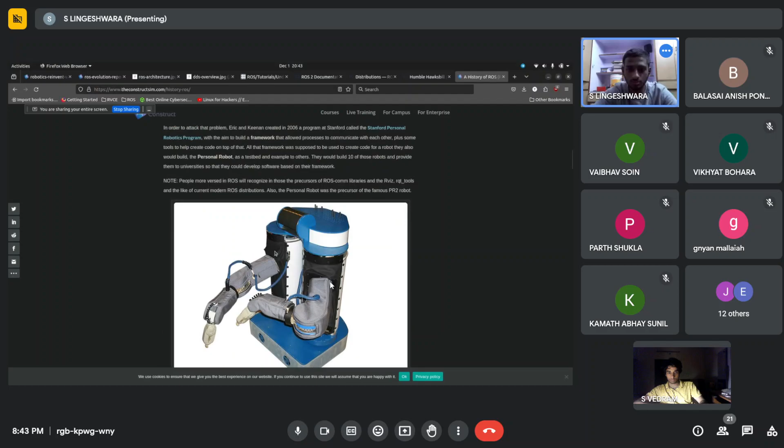So what happened was they started this as a personal project, and then a company - I don't know, I forgot the company name, it starts with W - that company started building personal robots. These same guys started to build personal robots, and once they did, they started focusing more on ROS.

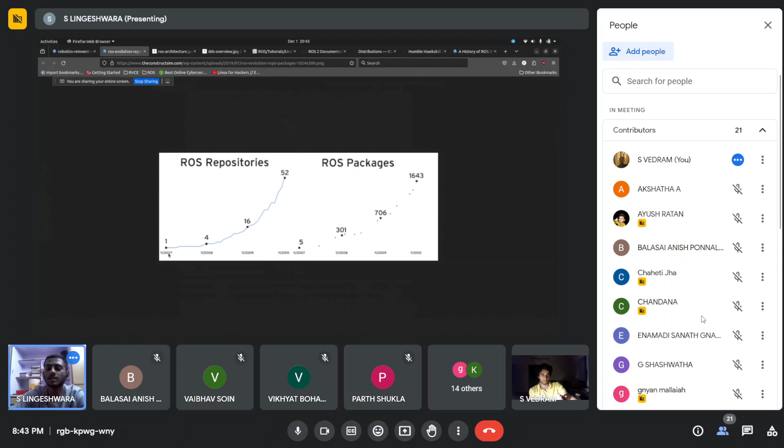Once they started to focus on ROS, it took off very fast, and I have an image showing how fast the ROS repositories and packages grew. This was when they were working under that company, and how people started contributing to a single framework which can be shared by everyone - that's the beauty of open source too. So they started this.

Look at the tangent, look at the curve, how it's like straight up. And once the number of packages and all started increasing, sadly what happened was the company suddenly announced in 2013 that we are going to dissolve. Everybody was wondering, and a lot of people in fact started using ROS properly in their projects. ROS made deals with some companies to ensure smooth working of the operating system, not of ROS itself.

Like one example is Gazebo. Now, what is Gazebo? Gazebo is a 3D simulator. You can simulate any kind of world you want in Gazebo. There are other simulators as well, but a lot of people, just because they're using ROS, and Gazebo is already very easily compatible with ROS, didn't use the competitors or other alternatives available in the market.

So when the company all of a sudden announced, we are going to stop, we are going to dissolve - this happened in 2013 - everyone was in shock. And that was when Open Source Robotics Foundation was formed to continue the work of ROS. The company name is Willow Garage. Okay, Willow Garage, that's the name. So that's what happens.

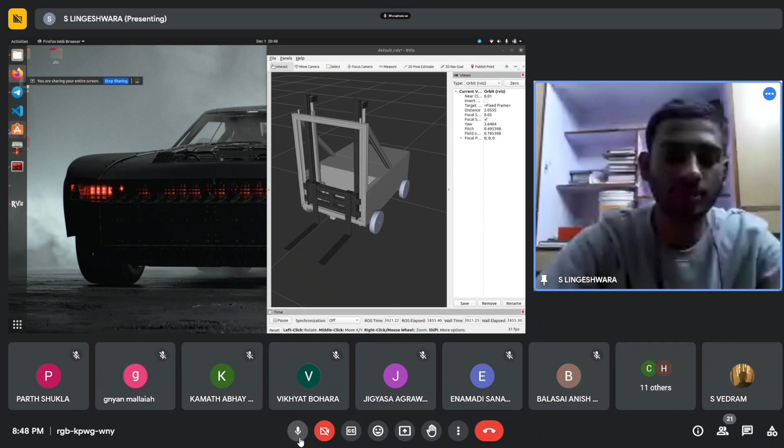Yeah, so one thing you might be thinking is: is ROS an operating system, right? I mean, the word operating system is there in ROS, right? But we made you install Linux. We didn't make you install some other operating system called ROS or something. So where exactly does this whole operating system thing come into picture?

Okay, so when you're building a robot, you will have multiple high-level algorithms. You will have algorithms that deal with how you want the robot to move in a very complicated environment, or figuring out what environment it's in with the details it's given. Those are extremely high level algorithms that are assuming you're giving it a lot of data to even work. But the thing is, where is all this data coming from?

This data is coming from the sensors you've put throughout the robot, like a wheel encoder. So what is a wheel encoder? It's basically a sensor that calculates how much a wheel has rotated. It's extremely important if you want to find out how much your robot has moved. If your robot has moved 1 meter, your wheel encoder will tell you your wheel has rotated these many degrees, and based on it you can calculate how much the robot has moved.

Or you have an IMU, which will tell you how much it is accelerating at a certain moment. So all these are low-level hardware stuff, right? As Lingesh told, all these complex algorithms will tell that the robot should move at a velocity. Who is going to execute that velocity? It's the motors on the robot and the motor drivers, controlled by a microcontroller like an Arduino. So ROS is basically that overall thing between all these high-level algorithms and the low-level stuff of controlling and getting data from sensors. It's that all-in-one package that did not exist before.

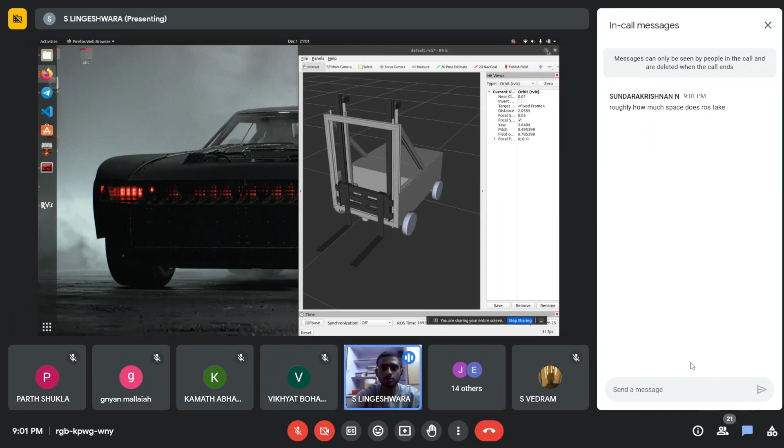I wanted to show you guys how this visualization works and all that. One second. So this is the RViz window. This is ROS1, okay, but still it's fine, we can use it. See, now it's closed.

This is my RViz window. This is how it will open for you guys also. See, the advantage is that the GUI is already there. I don't have to sit and create the GUI. And you can also do a lot of other stuff as well.

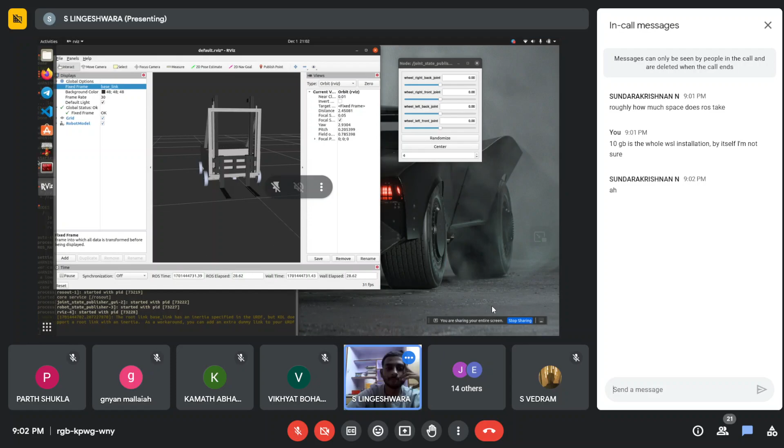See, for example, base_link, add robot. You guys have seen HIL, no? Can someone unmute and answer in the workshop? Yeah, see, now you can visualize HIL on the RViz platform itself.

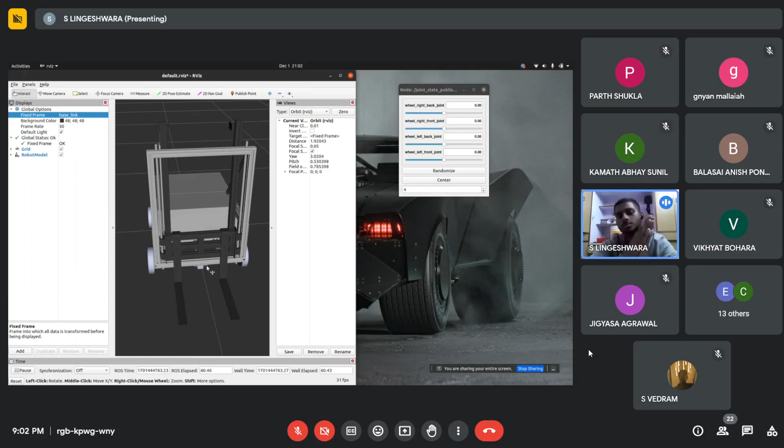Now, in the actual HIL, if I want to get laser data, I have to do a lot of work, I have to find what is their driver, ROS particular driver for my LiDAR, and then have to integrate it and all that stuff. But the advantage of using this RViz is for visualization.

If you want to use Gazebo, I'll show you what Gazebo is also. So this is how you basically visualize. If you want to add anything, for example, you create a map and you want to see what map you've created, there is something known as map topic. When you click, now there is no map obviously, but if there is a map, it will show up here. Likewise, anything you want, any kind of data, camera, depth cloud, some things which we might use is probably camera or LiDAR, laser scan.

Laser scan, so 90% we might use in our stuff also. Point cloud, odometry. These are the things that we will be using, and what these are, you will get to know slowly. There's nothing to worry about this as of now. So this is one thing which I wanted to show.

I'll close this. And another thing is Gazebo. Hopefully it will work. Launch. Okay, Gazebo.

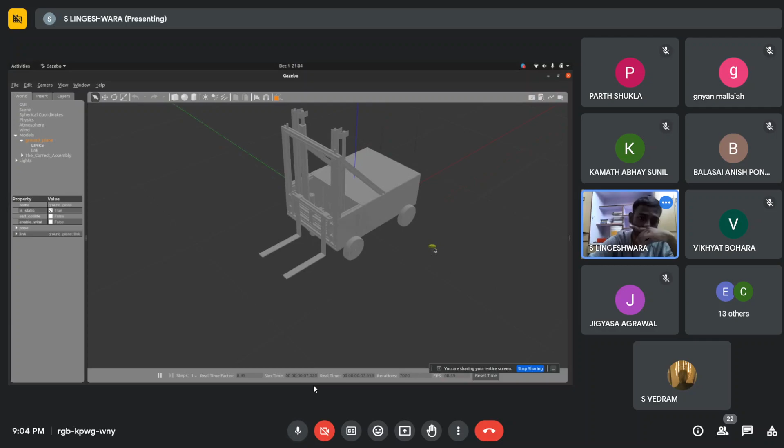When did you do this package, bro? This was some long ago. I think once it started opening like some haunted thing, after that he figured out how to get it together. Okay, send it to me. Send this package to me later.

Okay see, this is your Gazebo window. This is how the Gazebo window will look when you guys will be working also. The main point of Gazebo window is I don't want to sit and do everything in practical. So for example, for the URC challenge, I want to create a world.

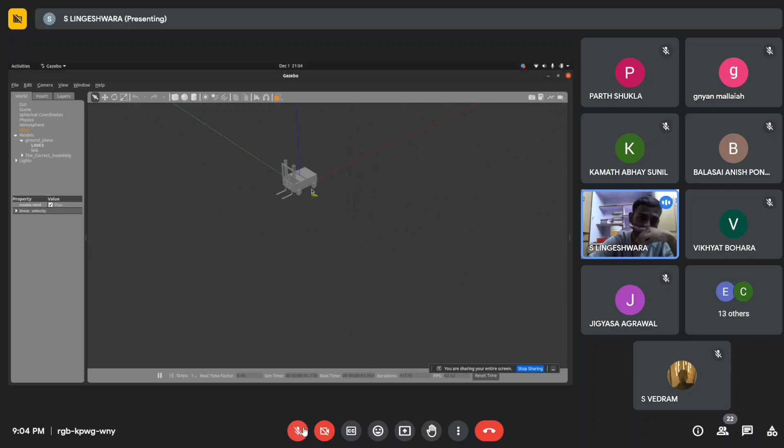You can add it here, change every parameter also, the physics of how the wind will be blowing and all that stuff. But more importantly, if I want to create a custom world, for example URC only - University Rover Challenge - I can create a space where there will be a QR code already in the world, and I can simulate how the robot might work. Using that, I can make changes to my actual robot. That's the whole point of Gazebo. It is a 3D simulator where you can change all the physical parameters and stuff.

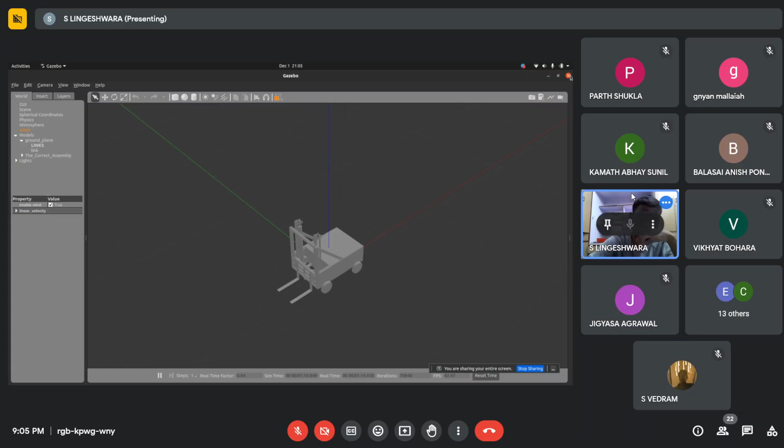These are the two main things which you guys will be using, Gazebo and RViz. If we have enough time, we can also create a small world and launch our own robot. We'll see how things go, and then we'll decide what to do.

You can also show that real to sim video if you have it on your desktop. Where did we send it? WhatsApp. You want me to send it on Telegram? Yeah, that would be better. One second, where is this?

The difference between Gazebo and RViz: RViz is more used for what is actually happening in your real life scenarios. It's a visualization tool for all the data that's coming in from your sensors. I will show you one RViz example. Gazebo is more used for simulations, for environments that you want to simulate and see how they behave without actually doing it.

RViz is to get to know in real life what it is doing. We'll show you a laser scan. You want me to send laser scan also? Whatever you have, send it. I'm sending real to sim. Okay, that also works. I'll send the point cloud also. One second, if you find it, send it. I have it somewhere. Anybody else have any other doubt in the meanwhile?